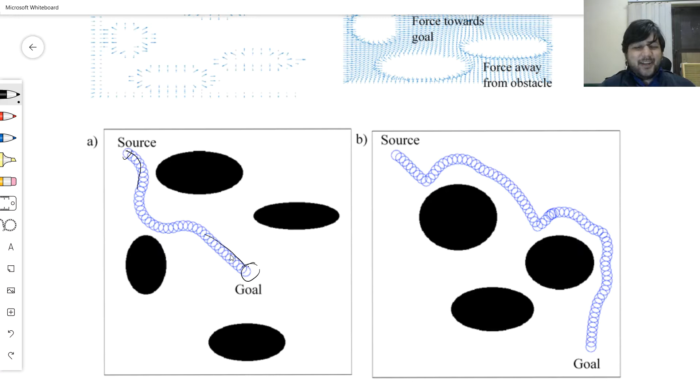Now, of course, it's not always a very beautiful story. So, if this was the best algorithm, I would have very jubilantly said that, hey, we've solved a great problem. Now let's discuss it a little bit deeper, and let me give you a little bit more intuitive insights, maybe,

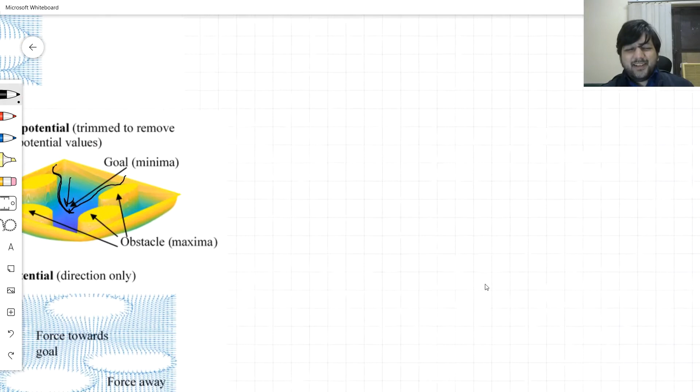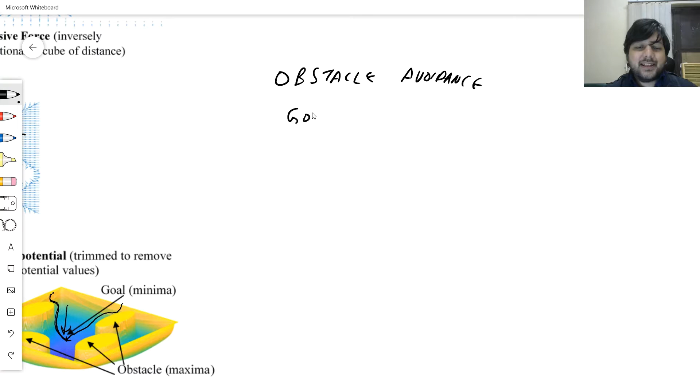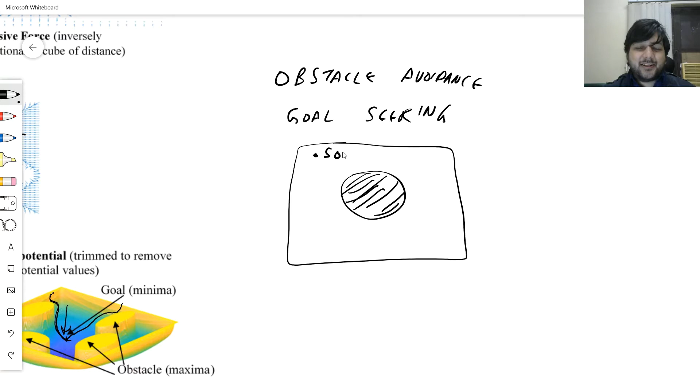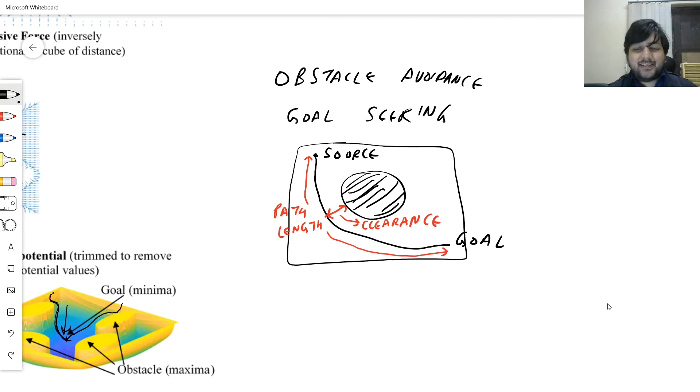Now, that's how the robot goes, potential field, and this is called the path length, and this is called the clearance. And the two objectives are completely contradictory to each other. Let me show it by an example. So, the same scenario twice. So, this one has a large clearance and large path length. And this one has a small clearance and small path length.

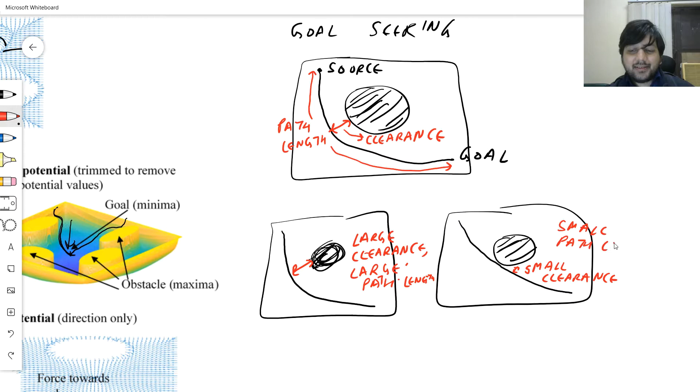Generally, I need to maximize clearance because with small clearance, the robot can make some errors and collide. All the sensors are noisy, so we don't even know where the obstacle is. We just have an indicative idea of the obstacle. We don't even know where the real obstacle is.

So to be safe, I want as much clearance as possible, which in a modern world you call personal space. Nobody comes here, nobody comes here. My personal space. So when somebody comes too close, you get conscious. God knows what the guy will do. You don't have that much trust unless you are close friends.

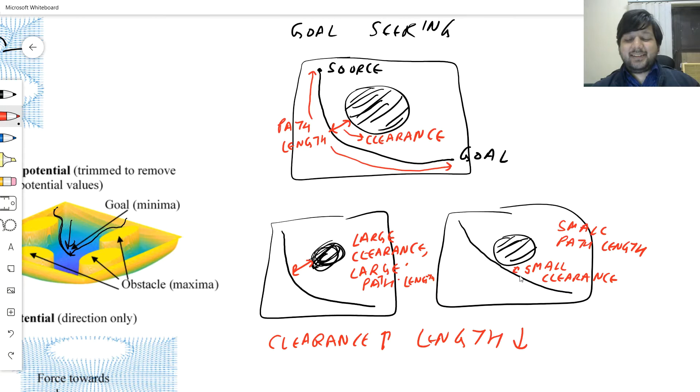So, larger clearance is always better for robotics, and smaller path length is always better in robots. So, it's a trade-off. It's good by clearance, bad by path length. It's good by path length, bad by clearance. Now, what's the trade-off between the two behaviors, obstacle avoidance and goal seeking, over here?

If I increase the attraction force, the attraction is so large that the robot goes running. It doesn't much care about the obstacle. So attraction is too large. It's feeling the repulsion, but the repulsion is smaller now. Two charges can never touch each other. I mean, two same charges will have to repel. So once it goes very close, the repulsion becomes almost infinity, 1 upon d cube, and d is so small. Then it starts repelling.

So the clearance reduces and the path length reduces. So out of which this is bad and this is good. Clearance and path length are opposite to each other.

If I increase the repulsion force, so I put more negatively charged particles, I put too many negatively charged particles. So now what will happen is the robot here only will start feeling repulsion. Attraction is small in contrast to repulsion. It will start feeling the force. So clearance increases, which is good, and path length

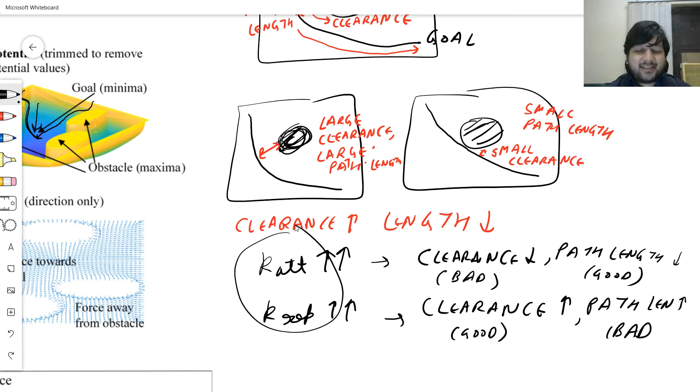increases, which is bad. And therefore, multiple robots will have multiple constants which will enable them to take multiple kinds of distances. Some will go close to the obstacles, some will go far from the obstacles. And how much distance the robots in general keep from the obstacle is governed primarily by the constants that drive it, the attraction and repulsion constants.

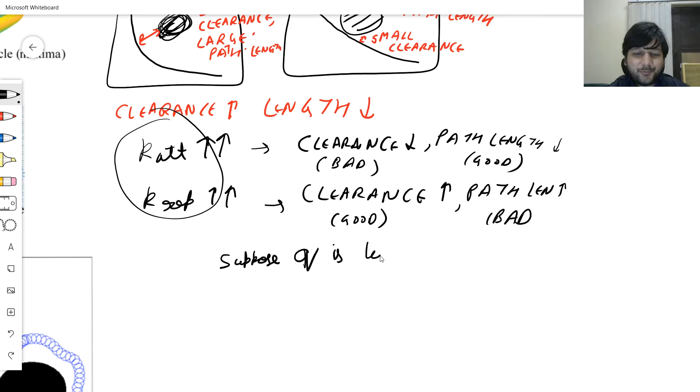Now, a very frequent thing that people, of course, in simulation classes say, and I have also said, is that there's a guarantee. There's a guarantee that two negative charges will never collide. And the guarantee is given by: suppose Q is towards collision with obstacle O. That means d(q, O) tends to 0.

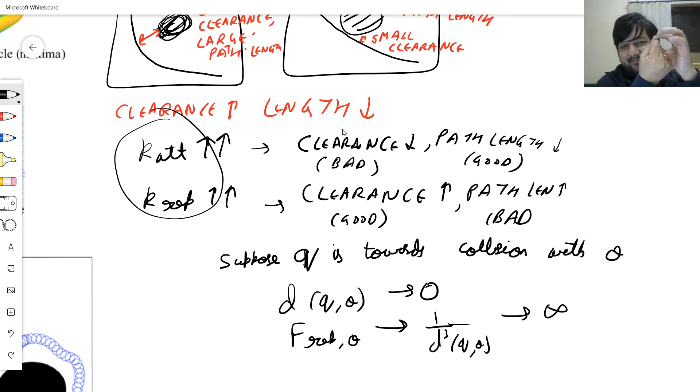That means the repulsion at Q due to O tends to 1 upon d cube, which tends to infinity. So as your robot comes very close to the obstacle, it feels a near infinite repulsion and it can never collide. So theoretically it can never collide. If you are from a physics background, the magnitude of energy that will be required to fuse two electrons together is infinity. Practically you can never do that.

But then if you implement the potential field, which you will have to in your simulations, which we do next, you will see them collide, and many people are like, what just happened? We proved physics wrong. You actually did not prove physics wrong. Let's take an example.

All of us are doing what is called a discrete simulation. A discrete simulation means that at time t, you decide the control input and implement it to get the state or the pose at time t plus 1. So that's what we say.

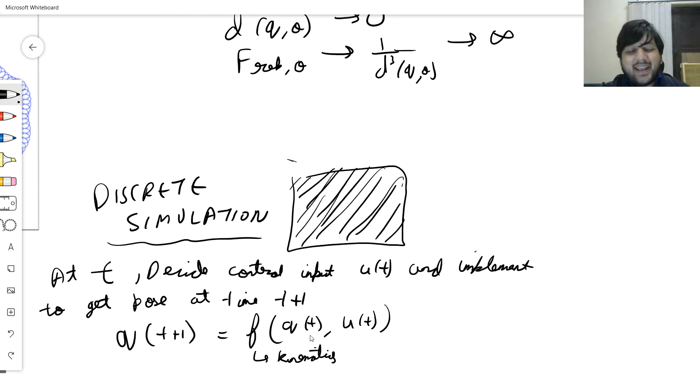And this is the kinematics of the system. In other words, in a general sense, this is the kinematics equation that says to a robot at a position or state qt, I apply a control input, which is linear and angular speed ut, for delta t amount of time. So that's what happens: I get a new state, I get a new pose. Wonderful. And then I apply for another delta t, I get t plus 2 delta t, and so on and so forth, where this is the frequency of control.

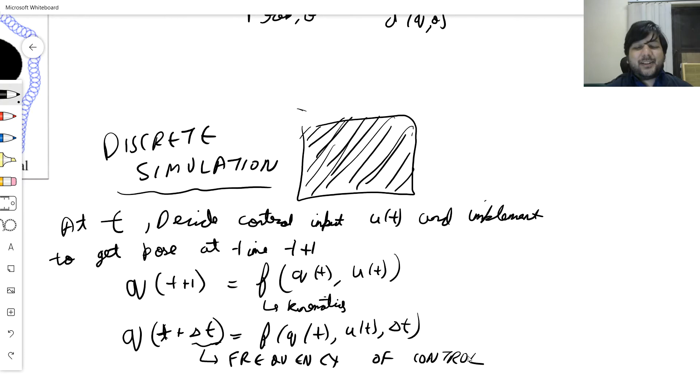So typically you will operate them at, say, what? Once every 100 milliseconds, once every 500 milliseconds. If you operate once every 500 milliseconds, for 500 milliseconds you don't have any control. That means for delta t time, I have no control, and the robot moves by the same old ut.

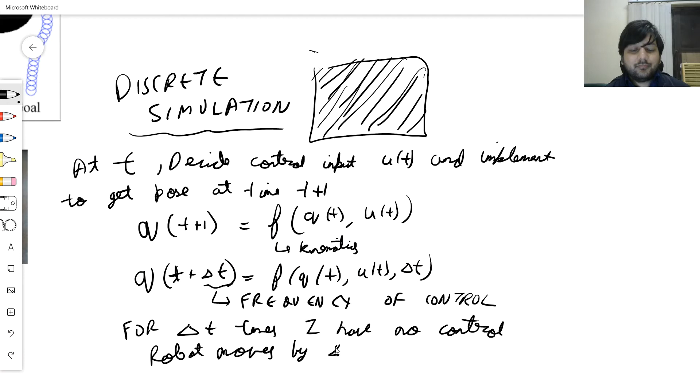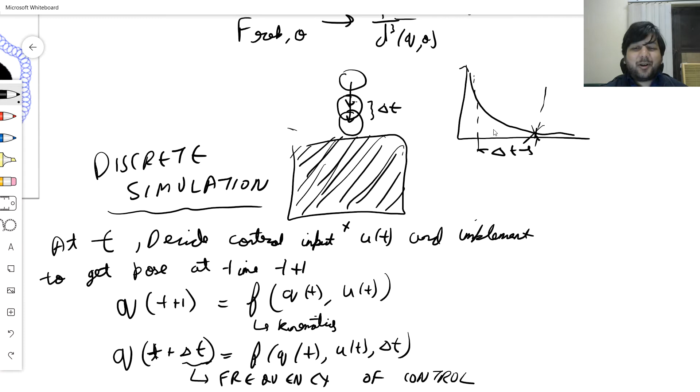Now coming to the example, let's say the goal was here, the robot was here. It's far away, it barely felt any repulsion. It moved for delta t time, it's again far away, it barely felt any repulsion. It moved delta t amount of time, now suddenly it's almost colliding. So the problem is that in this delta t amount of time, the force went from near zero to near infinity. I applied the control over here, but the second control I got was over here. That's one problem.

The second problem is that robots have kinematics. You cannot go at 100 km/h with your vehicle and suddenly get to zero speed. You've got kinematic constraints, and robots have those constraints. You cannot suddenly stop. So even though you applied maximum brake over here, you were traveling at 100 km/h and you just couldn't slow down. So the problem is that it's a discrete simulation, and for delta t amount of time you don't have any control, and that is the same example we give for human driving as well.

Why not drink and drive? Your reaction time is delta t. For delta t, you are not doing anything. You look at something, it takes delta t amount of time to process. Till then, you're going at the same speed. So if you drink and drive, you say the vehicle is far away, let me continue at the same speed. You look at the vehicle close by, and for delta t your processor is processing. By the time you act and tell your legs to apply the brake, the accident has happened.

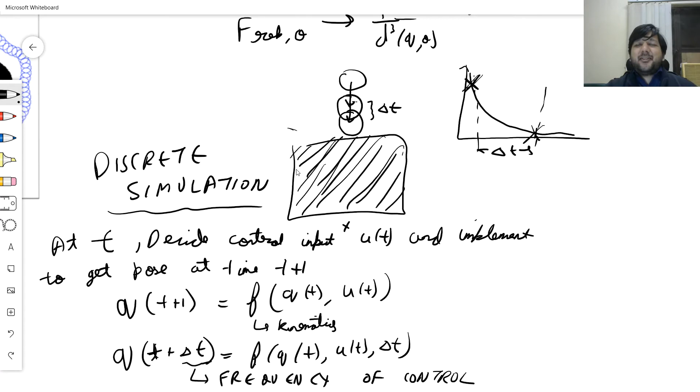If it was a continuous system, vehicles could never collide, which is why people don't collide when not drunk, when attentive, because then you're operating at a few milliseconds. Delta t is just a few milliseconds. So if you see potential field robots colliding, it is not because the theory is proven wrong. Theoretically, robots can never collide. It's because of the discretization that is applied, and the kinematic constraints, of course.

Now, all this is good. Let me do away with the simulation and go a little towards practicality. Is this still the best algorithm? The answer is no. The first problem with potential field is that it gets the robot stuck. Let's take a very simple scenario and simulate it. That's a wall. By the way, it's a practical scenario. When we executed physical real robots with the potential field, that was one of the first things we learned.

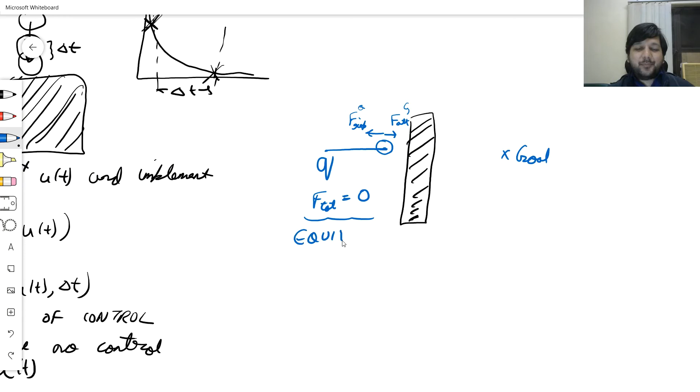That's your robot. That's a goal. The robot comes over here: attraction, attraction, attraction, repulsion, attraction, repulsion. So let's see what's happening over here. By a free body diagram, there's an attraction towards the goal and there is a repulsion from the obstacle. The two forces are equal and opposite, and this is where F total is equal to 0. This region is called the equipotential region. It's also called a local minima.

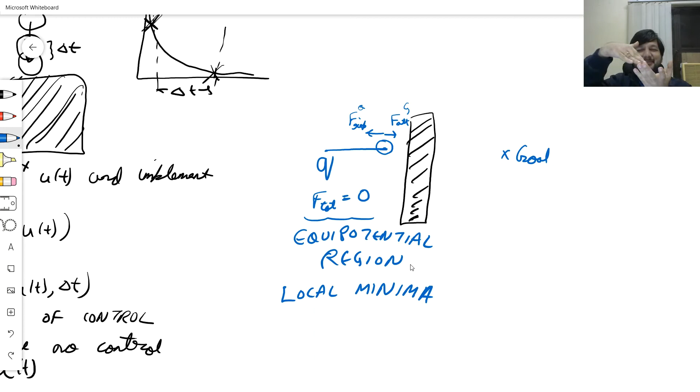We took examples of rivers flowing, water flowing. All of them have local minima. What are lakes? Rivers flow from the mountains and get stuck at a local minima. That's equipotential. So practically an environment will have many such local minima. In the previous example, if I start pointing out square obstacles, there were many local minima. So in a local minima, an equipotential region, the total potential value is 0, not because it's a goal, but because it's a local optimum. The forces cancel each other out.

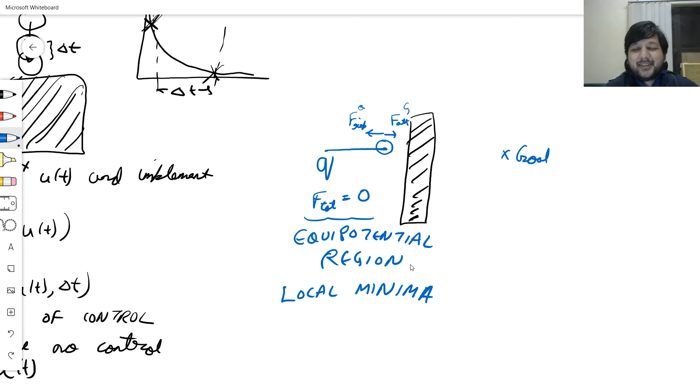There's another example, because we're dealing with multiple agents. I've got 3 robots. Robot 1 wants to go over here, so it has an attraction towards its goal. However, there are also two other robots; this one wants to go here and this wants to go here. So if you draw the free-body diagram of this, there's F repulsion due to 1 and F repulsion due to 2. Now, it turns out there's a little thing that is again nature inspired and pretty intuitive.

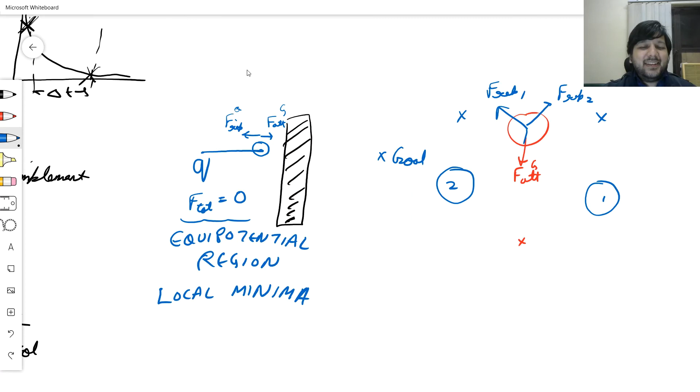So when it rains, water also gets logged right behind me in the road, but that doesn't stay long. So in nature, sometimes when you apply a perturbation, the local minima problem is solved. Water gets stuck, you just shake it a little bit, and once you shake it a little bit, it vanishes. And that's exactly what will happen over here.

So I'm here, the other two robots are here. I'll shake this a little bit. They'll again get stuck around over here. I'll shake it more. Eventually a situation will come when, shaking the three robots, it's no longer an equipotential. So the equipotential region can be broken just by shaking.

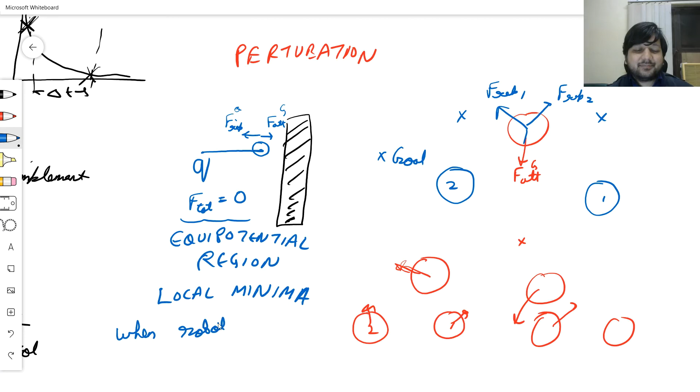So when the robot is stuck, what I do is I apply a new force, F rand, which is just random, and I keep on increasing its magnitude along with time. Now if you just apply it randomly, you keep on applying it at a different place. So what you do is you select a random direction and keep on applying it a little biased towards that random direction, and you keep on increasing the force.

So you're stuck, you've detected it, you're not moving. You say, let me apply to the whole system a little bit of a random force. So you apply a random force and just wait. Most of the time the system will get back to the same equilibrium again. You apply a little more force and wait, and it sometimes gets stuck at the same minima again. Then you apply more force, it gets back into the same position.

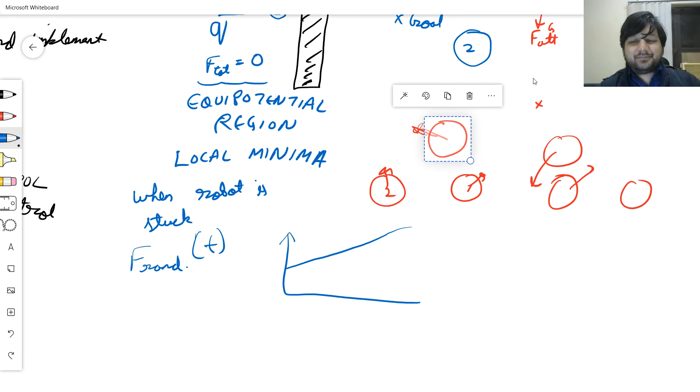Eventually, with a large enough force in a random direction, moving a little biased towards that direction for a longer time, the local minima gets resolved. That's exactly what will happen over here. I'll apply a little bit of a random force, it'll again get stuck. I'll apply another random force, it'll again get stuck. Eventually I'll apply some random force and it'll get out like this.

Now the problem is that theoretically speaking, every minima can be resolved by applying sufficient random force, but after doing that, you go out of one minima into another minima, then into a third minima. So you can, your entire life, keep on switching minima, and that is not a practical solution. So the actual solution, not a part of this course, is where we fuse an A-star like global planning algorithm with the potential field algorithm.

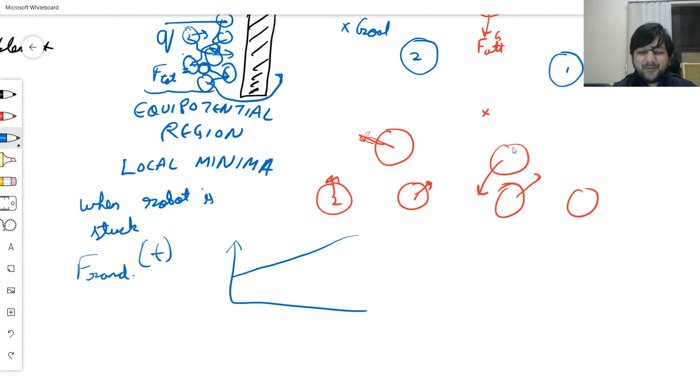Remember what I said about the corridor. If you had known this topology, you would have applied the attraction force not towards the goal but at the corridor end, and you would have been out. So that's one of the major problems with the potential field. There's a little interesting problem as well, at narrow corridors. And if you had a class on control theory, you will understand exactly what this problem is.

I start from here, that's my goal. I primarily feel repulsion due to this. I go here. Here it's equipotential and the attraction and repulsion forces cancel each other out along this line. But remember, a robot at this orientation cannot suddenly be oriented in the direction of the goal. It's kinematically not possible. I allow an erroneous control by converting force into immediate velocity, which is okay for the current simulations, but practically the robot cannot suddenly turn.

So it'll continue to move here. Of course, it'll slowly turn. Now it feels attraction over here and comes around over here, and it will not stop here because of momentum, because of kinematic constraints. It will continue over here. So in a narrow corridor, that's the actual motion. It's called oscillations. And you would know it, with a P controller, what happens: oscillations.

Here we still don't have a PID. Attraction to the goal and repulsion from the obstacles are more or less saying that as error changes, the magnitude by which they force the robot changes, but there's nothing like the I and the D part of a PID controller. So it'll continue to show these kinds of oscillations, and because of that, it's actually pretty bad.